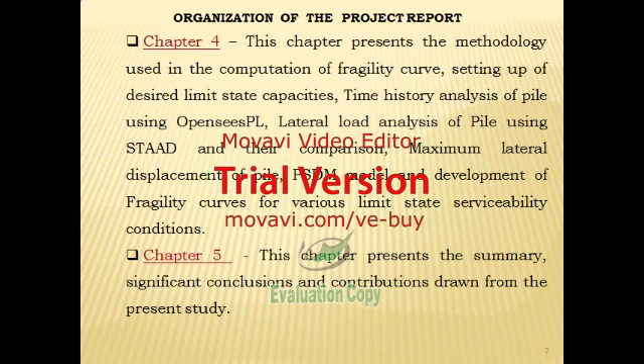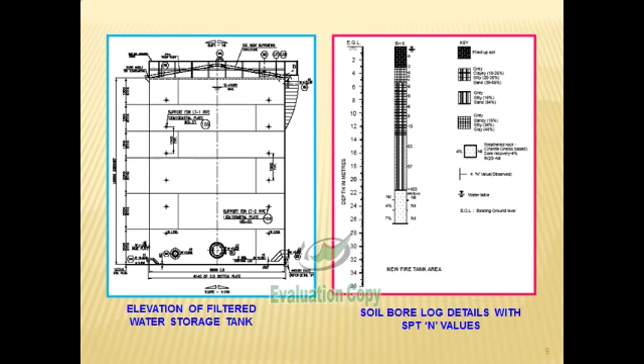Now let me present about my project.

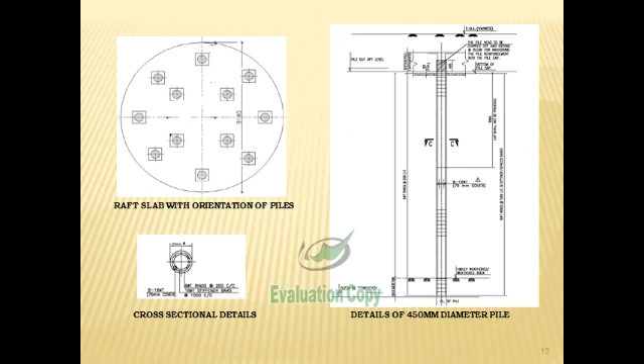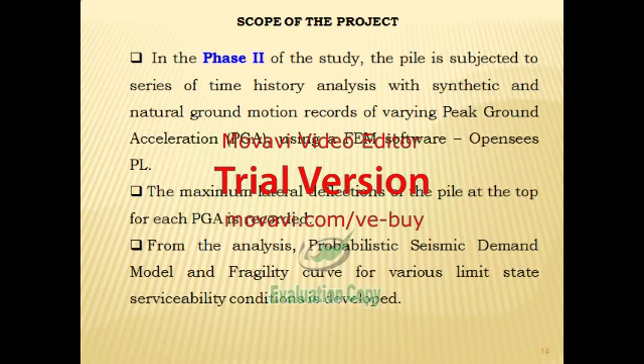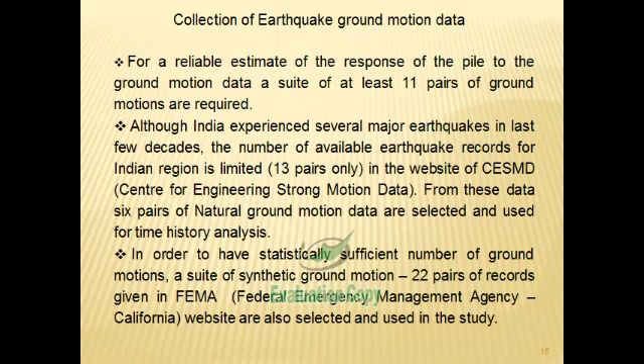Past and recent earthquakes have demonstrated that pile supported structures such as port facilities, bridges, etc. are prone to seismically induced damage in moderate to strong earthquakes. For example, the Loma Prieta earthquake damaged Oakland Port, of magnitude M6.9, and the Kobe earthquake of magnitude 6.9 completely damaged Kobe Port, and the Haiti earthquake in 2010 damaged Port-au-Prince.

This shows the necessity of reconsideration in the seismic design philosophy of this type of structures to enhance their seismic performance.

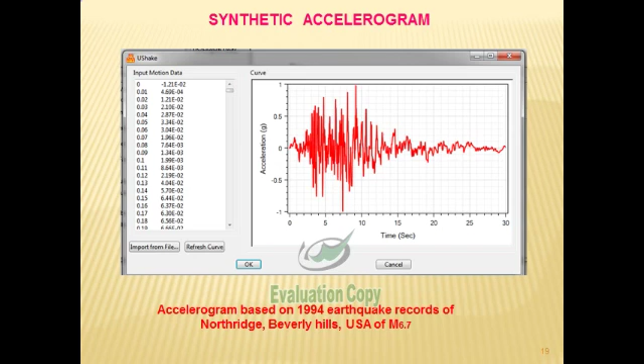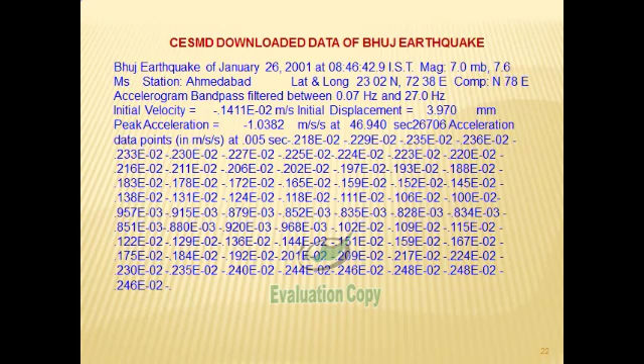Hence, seismic probabilistic risk assessment studies for the structure and its components such as piles, piers, decks, etc. need to be carried out. The first seismic probabilistic risk assessment study was carried out for nuclear power plants in the early 70s and is being used now also. Fragility curves are commonly used in civil engineering to estimate the vulnerability of structures to earthquakes.

Many parameters involved in seismic design have uncertainty associated with them. Characterizing the probabilistic nature of these parameters can be done through the use of fragility curves, which assess the probability whether the seismic demand placed on the structure exceeds the capacity condition.

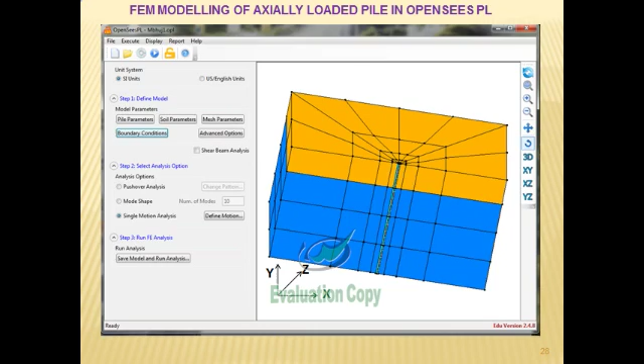Now, a common definition of fragility is the quality of being easily broken or damaged. That is a common definition.

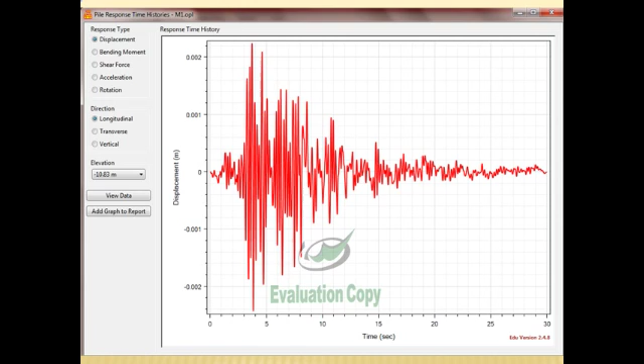Mathematically, fragility function is defined as a function that expresses the probability of exceedance of some clearly defined limit state, as a function of some measure of environmental excitation such as peak ground acceleration, peak ground velocity, or forces in an earthquake or hurricane, etc. In a simple way, a fragility function could express the uncertain level of shaking that a structure or its component can tolerate before it collapses.

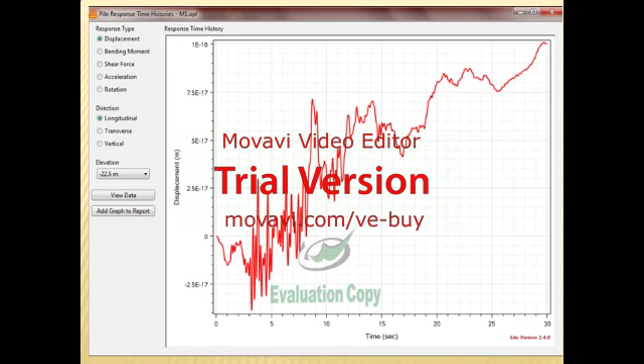Hence, the present study is taken up for the evaluation of seismic fragility curve for a single RCC pile.

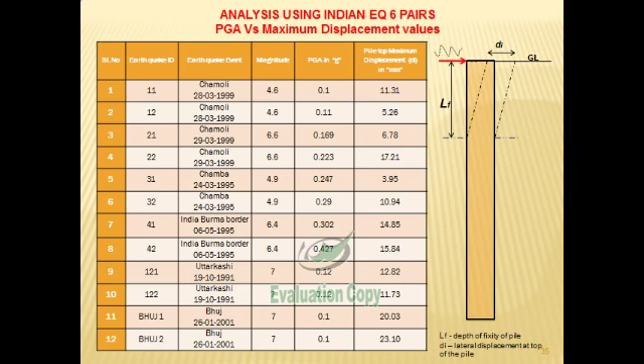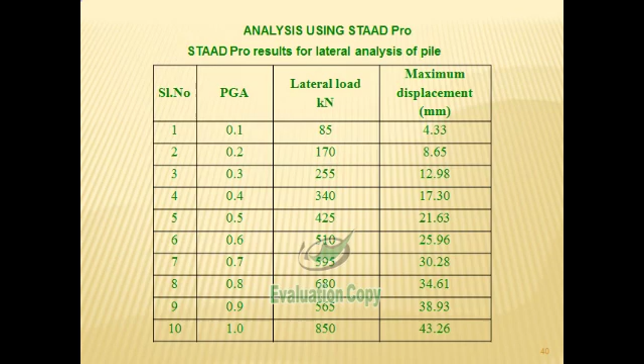My project report is organized into 5 chapters. Chapter 1 gives a brief introduction, the applications of fragility, and the scope of the project. Chapter 2 concerns the literature review. Chapter 3 discusses the estimation of load capacities of pile, selection of ground motion, synthetic and real-time ground motion data, and lateral analysis of pile using OpenSeesPL FEM software.

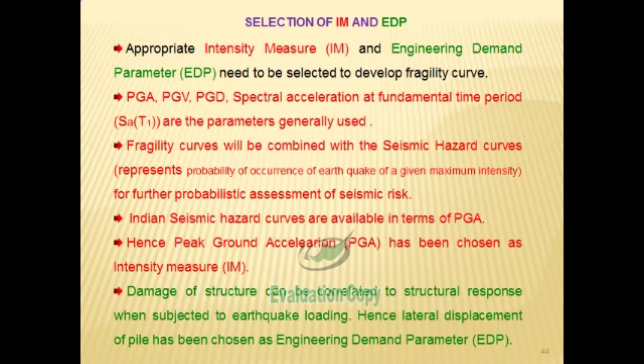Chapter 4 presents the methodology used in the computation of fragility curve, setting up of desired limit state capacities, nonlinear dynamic analysis, time history analysis, development of PSDA model, fragility curve, etc. Chapter 5 presents the summary, significant conclusions and contributions from the present study.

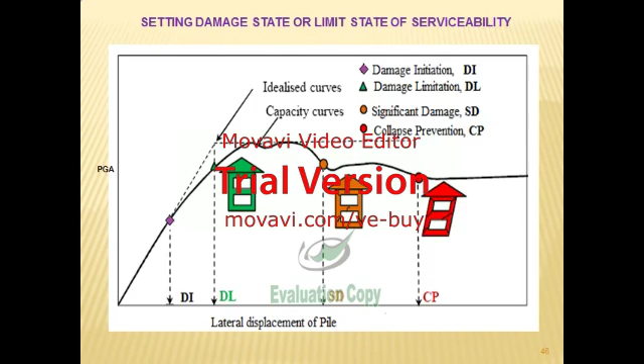Now the scope of the project. This project has been carried out in 2 phases. In phase 1 of the study, a pile, which is part of the pile foundation system supporting an elevated filtered water storage tank of an industry located at Chennai, is chosen for analysis and design.

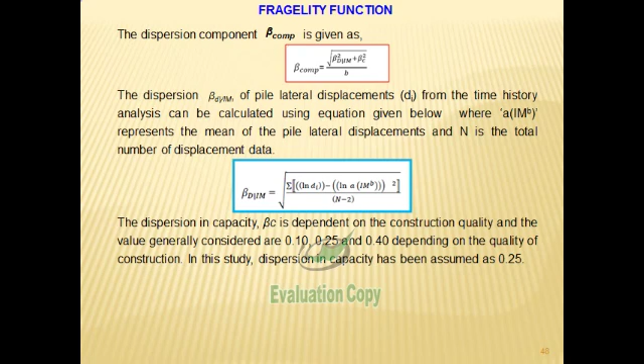The actual soil investigation data of various field and lab tests conducted for the industry site at Chennai is obtained and used. The load carrying capacity of the pile in axial, uplift and lateral directions are found out.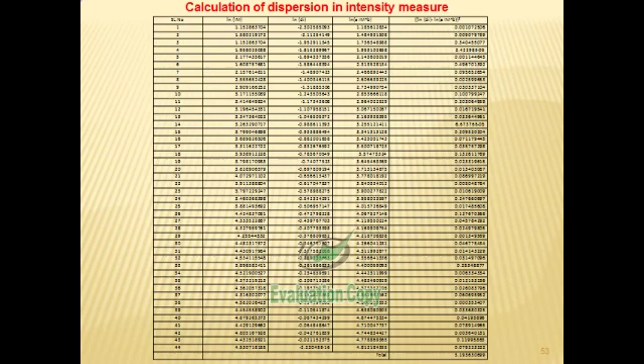Now the design inputs: the inside diameter of the tank is 8 meters, height of the tank above ground level is 10.5 meters, location is Chennai, and storage liquid is filtered water. Based on the dead load and live load calculation, the following load details are obtained: dead load is 234 kilonewtons, live load is 5026 kilonewtons, and the total design load is 5260 kilonewtons, that is 526 tons.

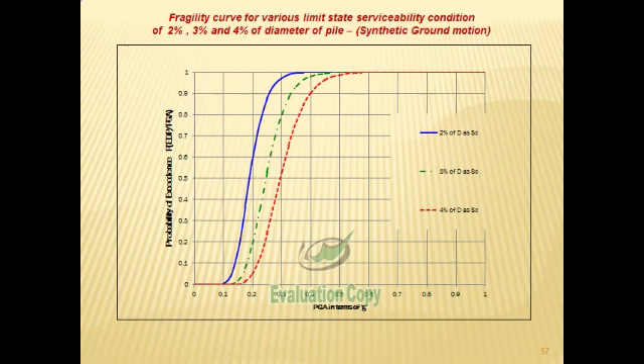Now, based on the soil bore log details, it is seen that beyond a depth of 22 meters, weathered rock, of granitic gneiss type, is available.

Considering this, the depth of foundation is chosen as 23 meters, and the pile type considered is an end bearing pile. Now, the diameter of pile considered is 450 mm.

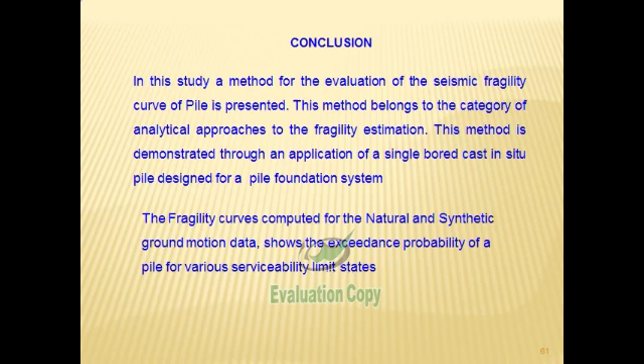Naturally, the socketing depth will be twice the diameter, which is equal to 0.9 meter into the rock, and the concrete characteristic compressive strength is considered as 25 Newton per mm square, and for the steel grade it is 450 Newton per mm square. Here I have to mention one thing.

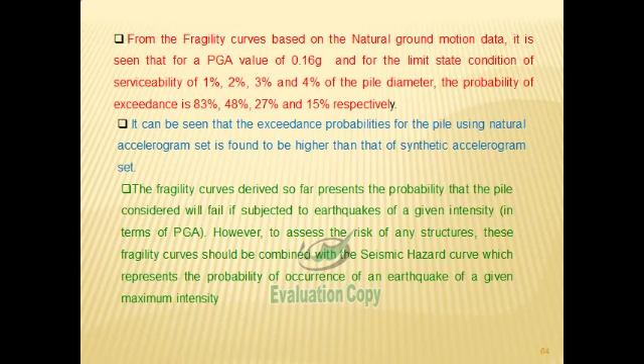Generally, for piles, M35 grade is generally considered, but in my study I have considered M25 as the concrete grade. Now, as per IS 2911-2001 Part 1 Section 2, the axial load capacity, the uplift load capacity and the lateral pile load capacity are calculated.

Now, for calculating the lateral load capacity, we require the depth of fixity, which in turn is based on the stiffness factor of the pile, based on the flexural rigidity of the pile and the modulus of subgrade reaction.

The lateral load capacity is calculated for a permissible lateral deflection of 5 mm.

In phase 2 of the project, the scope is establishing the fragility curve. The pile is subjected to a series of time history analyses with synthetic and natural ground motion records of varying peak ground acceleration using a FEM software called OpenSeesPL. The maximum lateral deflection of the pile at top for each PGA is recorded. From the analysis, the probabilistic seismic demand model (PSDM) and fragility curves for various limit state serviceability conditions are developed.